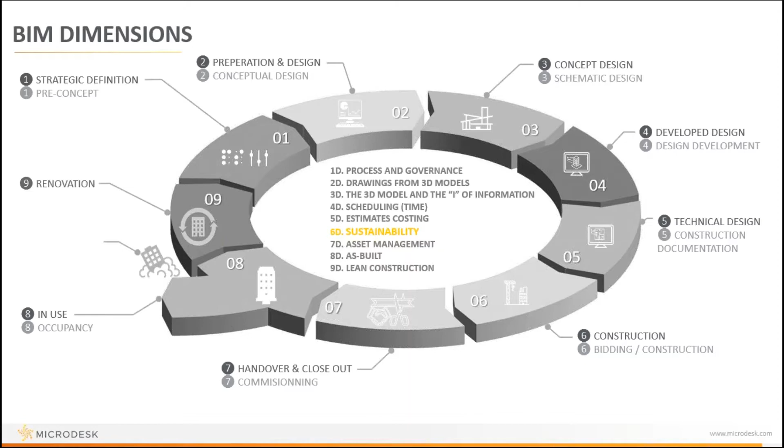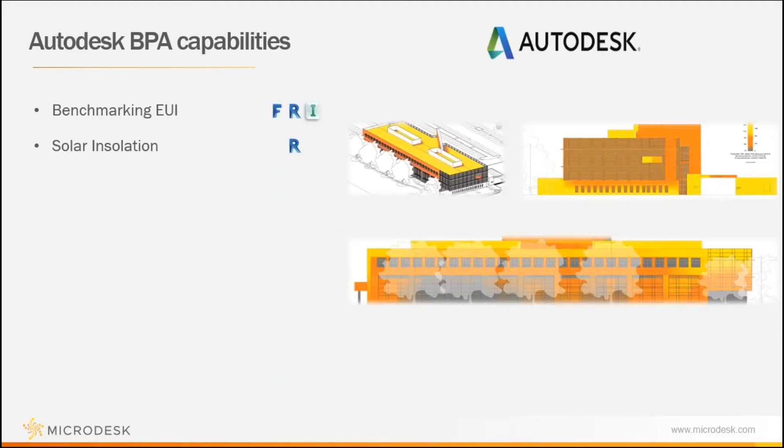On the next slide, we'll showcase our Autodesk building performance analysis capabilities. Here at Microdesk, we have the ability to help you benchmark and get your EUI within your BIM. We also have the ability to do solar insolation within your Revit model, as well as daylighting illuminance. The more integrated with BIM, keeping the information aspect in there, the better the end result. I really push for a single source of truth through BIM.

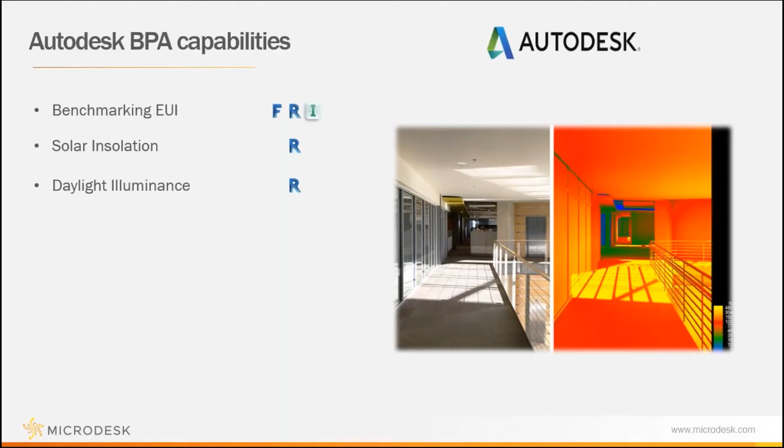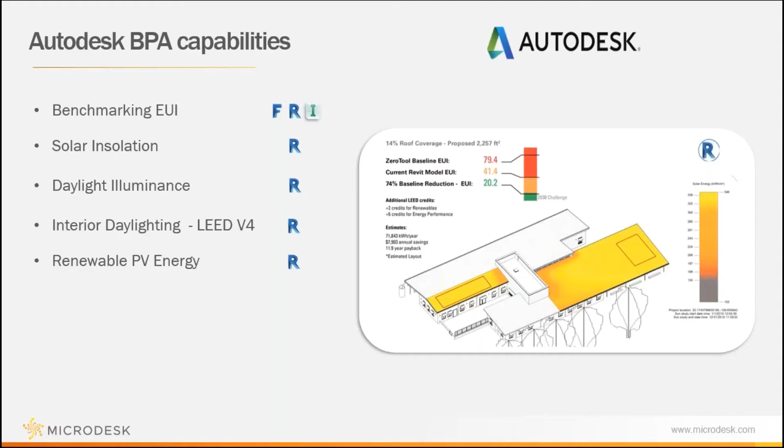Going through lighting, we have interior daylighting for LEED version 4 through Revit. We can also do renewable PV energy and get estimated payback times and estimated production. We can do building envelope heat transfer—we can do this in Autodesk CFD to extend your suite, but there are also free softwares out there we can help guide you with for envelope heat transfer studies.

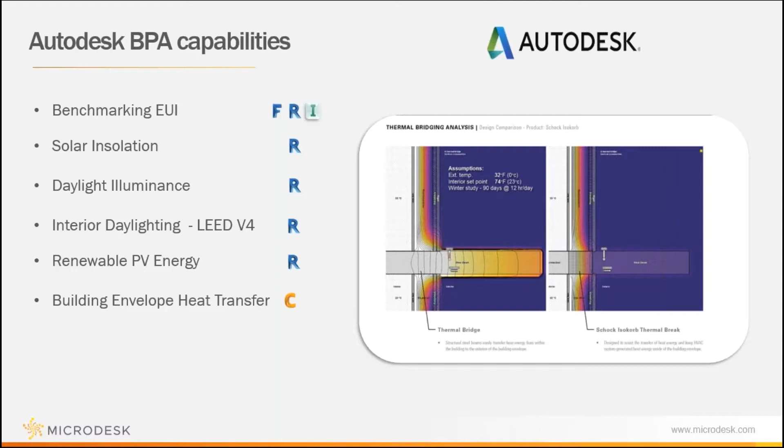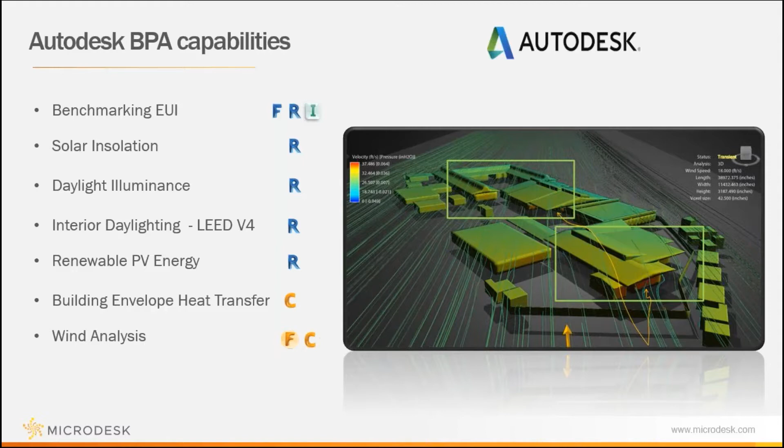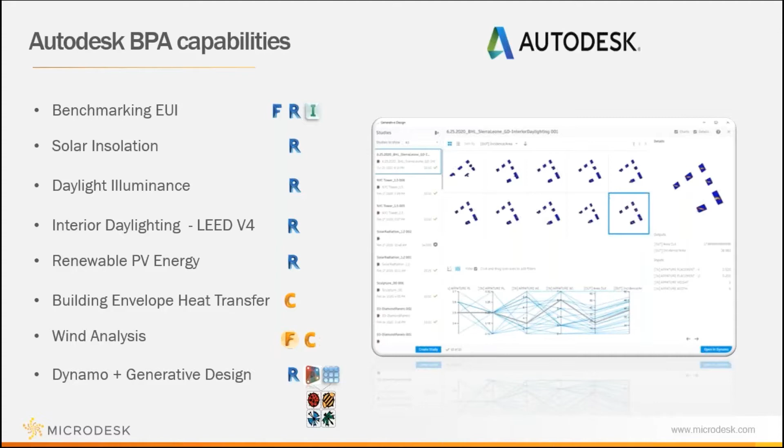We can do wind analysis with Flow Design and with CFD. There are other external tools for this, but to get you started we have all this within your Autodesk suite. Last but not least, the new kid on the block that everyone's talking about is Dynamo and generative design. We have capabilities for generative design through Dynamo, which we're using to leverage sustainable design—understanding which inputs will best leverage our building and give us the best head start from the beginning.

Aurora Solar can give you a system for PV design which you could hand to an installer and understand, down to the penny for your area code, what kind of PV designs are available to you. Cove Tool, Rhino, Grasshopper, Sefaira—all these tools are wonderful and good for their certain implementation. But the right tool for the right time is what we're trying to help you with—getting the best fit for your workflow.

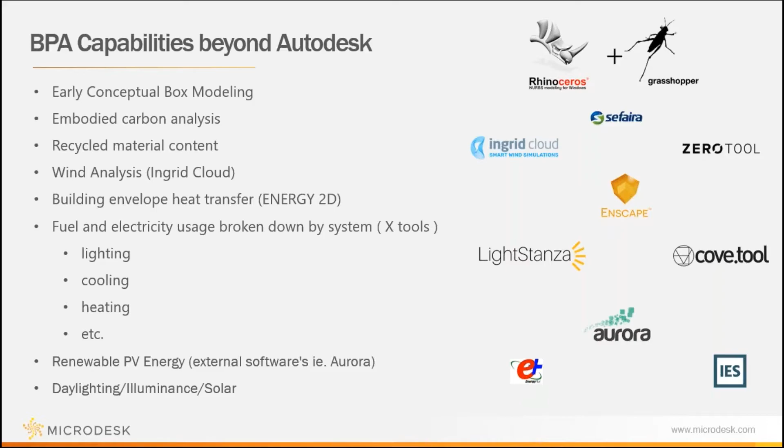So we'll briefly go over part 1 and part 2 of our sustainability webinar series. We started off with the NRG Stadium and the Astrodome Master Plan, looking at a multifamily complex, understanding building performance analysis through early conceptual design all the way through the more schematic and detailed design phase, which is what we'll go over today, where we start looking at systems analysis.

On the next slide, please, Jim. The plan today is to look at Revit systems analysis, which is a set of features that allows a mechanical engineer to define the main components and set of relationships that comprise a building system, all without having to physically model any part of it.

It's built using Energy Plus and Open Studio in collaboration with the US Department of Energy and the National Renewable Energy Laboratory. When you model in Revit to run the analysis, you export the data to Green Building Studio as a GB XML file. Then Open Studio takes that information from the GB XML and gets it into Energy Plus. Energy Plus then runs a bunch of simulations, which can then produce the reports.

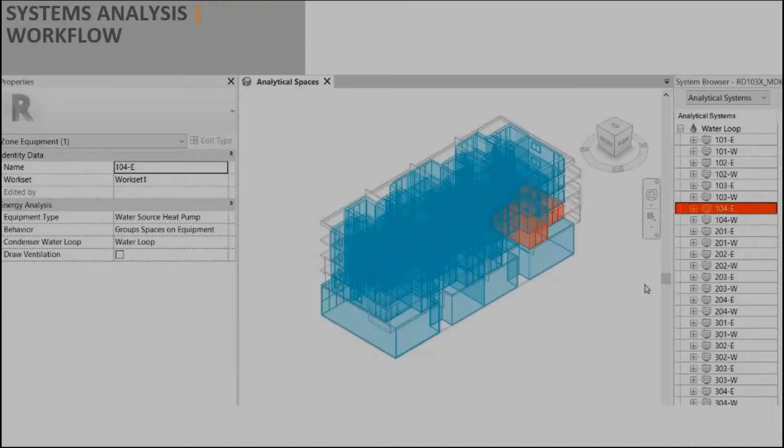The idea with the systems analysis workflow in Revit is that you define systems such as a water loop. You create equipment, say heat pumps, and assign them to the water loop system. In this example, we have separate apartments in our building. Apartment 101 has an east zone and a west zone. The idea in the loop is that you can see where there's a connection between the model and the building systems that we've got analytical setups for.

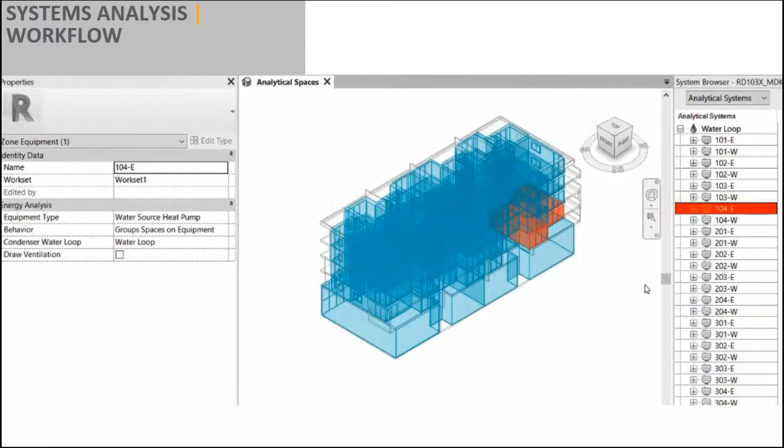Just to review how the model was set up, after we linked the architectural model, one of the first things we would do would be to set up the geographic location and the direction to true north.

As you can see here, if I just get this to run, we can go to the Analyze tab and pick our location. What you're seeing is the linked models that have the content in it, so we're able to take the architect's model and create really a copy of the things that are important to us. Where we look at the weather station, it may or may not be the case that that's the best location for you - you don't have to pick the nearest weather station.

You can also uncheck the box and... I'll start that again. We're having some lag time issues there. So setting up the weather station, what I wanted to show is that they're generally within 8 miles or 12 kilometers of the site.

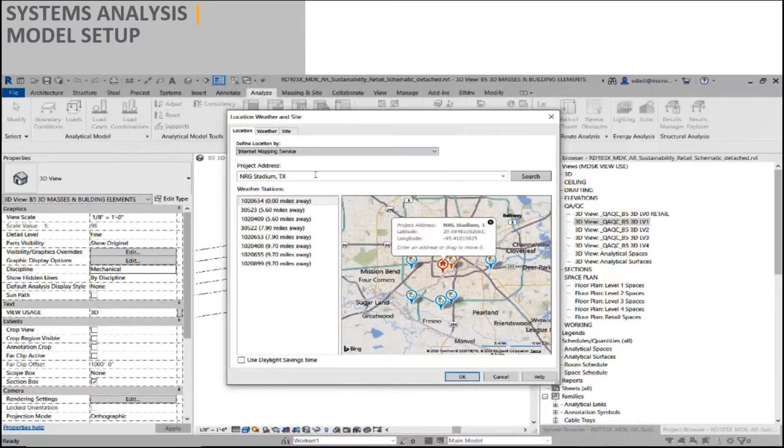You can pick the one that you want - we've got the NRG Stadium in Texas. But if you go to the weather station itself, you can also uncheck the box for 'use HVAC design data,' and you could enter the specific values that you want for the study. So you're not limited by what is offered in the defaults - you can overwrite them and provide your own values.

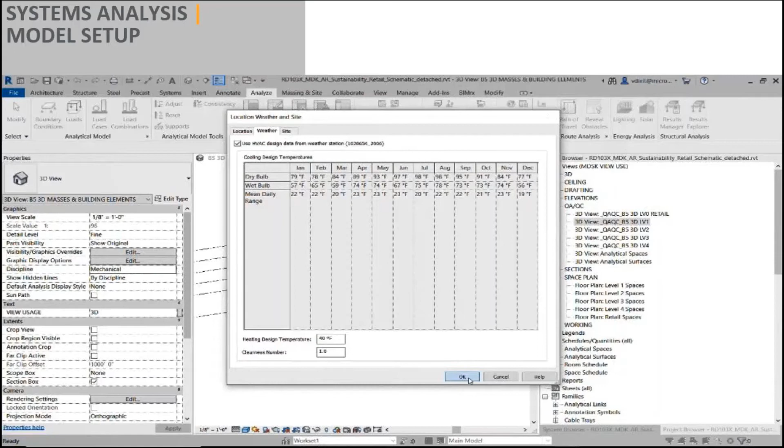The next thing we would want to do would be to actually bring in the elements of the building that are important to a study. I actually used this model for several different things, including light analysis using a rendering engine.

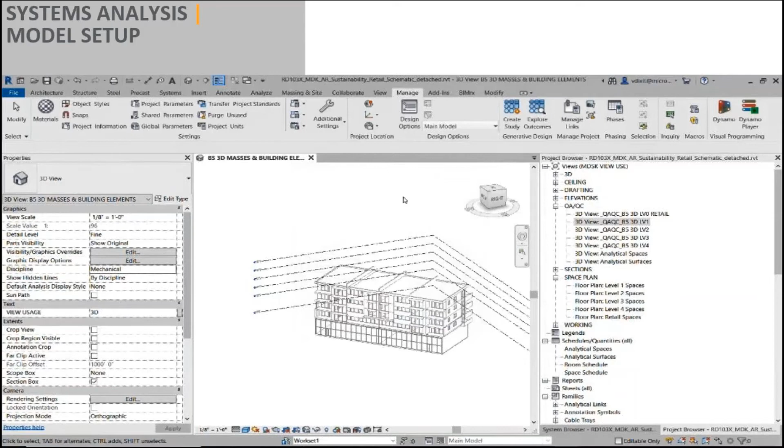We can use transfer project standards and bring in the architect's walls and floors, windows, and so on. And then we can use copy monitors, so that in this approach, what would happen is if the architect's model changes, we update it. By bringing in his actual walls and floors, we're making sure we've got the correct volumes in the building.

We have some quality assurance views where we can look at the different floors of the building and just confirm that the model is as we wanted it to be, where we're seeing walls in red, floors in blue, and the windows.

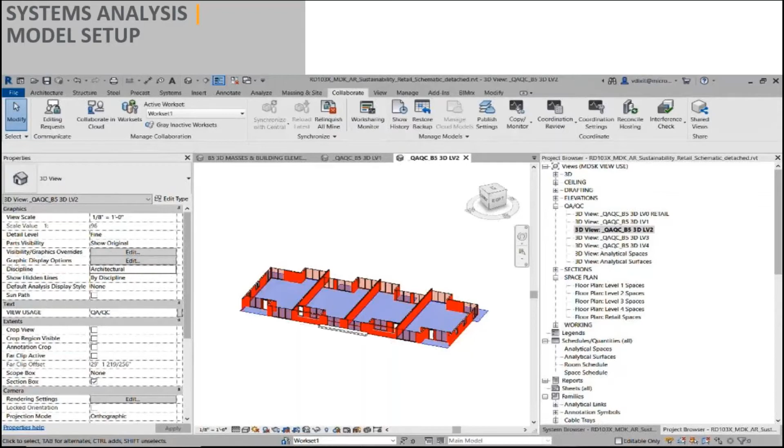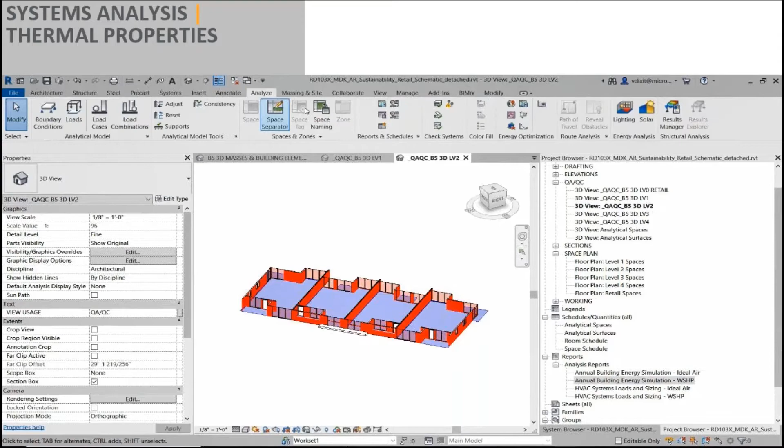So if I move forward with that, we're able to assign material properties with the U values using schematic type. Now that we've got the building model, or a copy from the architect's model, it can be updated anytime we want. When we submit for energy analysis, the option we could use is to tell it what the building type is, and then override any of the building elements with the U values that are required by code - in this case, in Houston.

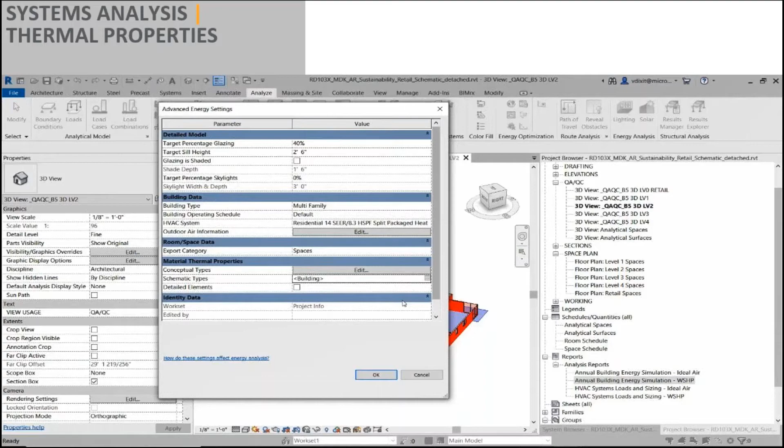I'm having a bit of a lag time here.

It might be that the architect, when working on energy analysis at a very early stage, has massing forms and building elements superimposed on them, used to imprint where the openings are, so you can do an energy study.

It's more likely that MEP systems analysis or energy analysis gets involved when you have building elements there and you're applying schematic types to override all the U values for the building elements themselves. There's also the option of using detailed elements that would override anything else - a checkbox when you submit that says use the actual material that's in the wall itself.

These are a little problematic. I've also run into situations with something like a hospital that's so old and been on the go for so many years that it may not even have thermal properties under the material. You'd actually have to introduce them to the material and assign the values you want.

There are cases I've seen where people have created their own wall types that are the same size as the architectural walls and assigned the material with the U values they want, especially when they have a special exterior to the building, maybe some kind of glass facade. So there are occasions where this would be valuable in creating the study.

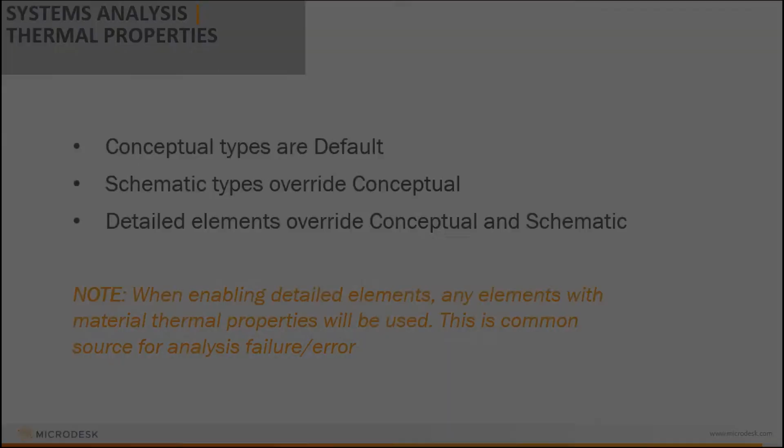We set out to specify what our building type is - you see here it says multifamily. In this first scenario, we've got residential units in the whole building, so we just need to assign building type, and any analytical spaces will be classified as multifamily.

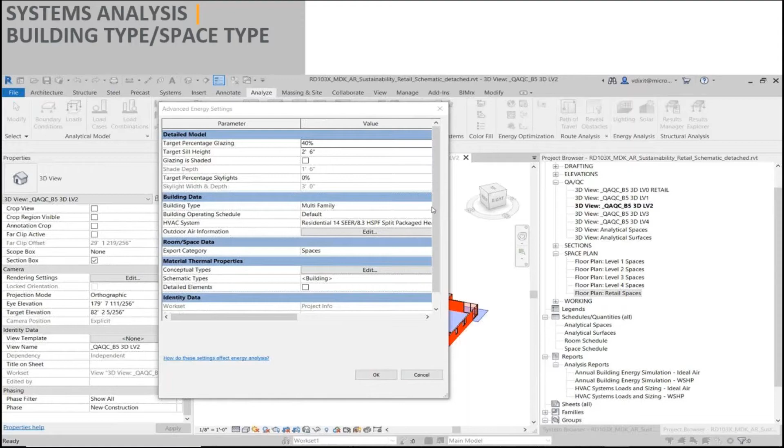We don't have internal walls at this point, so what we're doing is just kicking off a study, telling it it's multifamily, and producing our output from the reports.

If I look at the study here, we've got the Revit model, our single source of truth. We've got the energy model in the file, and we can have quality assurance views to look at the assignments. We have our systems browser showing what systems we've got, and output from the software on the performance of the whole building, or the heating and cooling loads for individual rooms or spaces.

If I move on, this is where everything is a single apartment, and we want to make sure the system browser is available to us and that we're able to define systems.

So what we're doing is looking at the system browser, only available to you if you've got MEP on your interface. Then we can do things like define a building system, say adding a water loop. There's already one there - this is just to show the process.

And you can define what it is, say it's condenser water - just delete it. So we've already got the building system.

Then what we want to do is define zone equipment. So we can create zone equipment, give it a name - we're calling it apartment 101, 102, 103, 104 - and defining which system it belongs to.

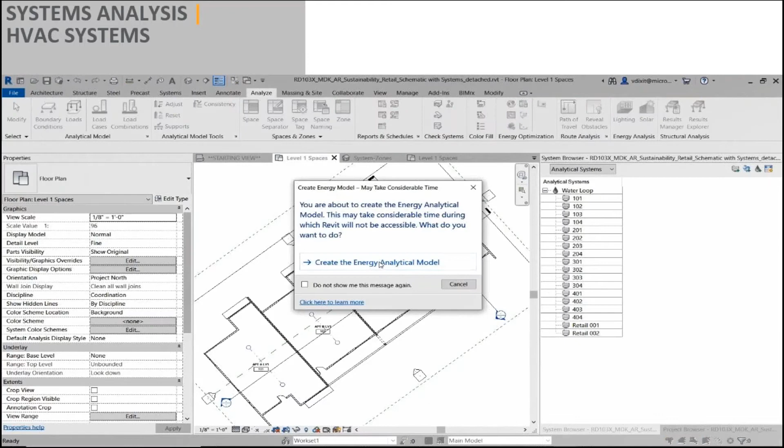As long as the lines intersect the space, they can be assigned to the respective zone and you can give it a name. So in our example here, when we kick off the model, it gets the loads from any spaces that are in there that have the ASHRAE standards for the different spaces.

And then we can kick off reports to get some quantitative output from our model itself. These take a while - it might take 15, 20 minutes before I get a report.

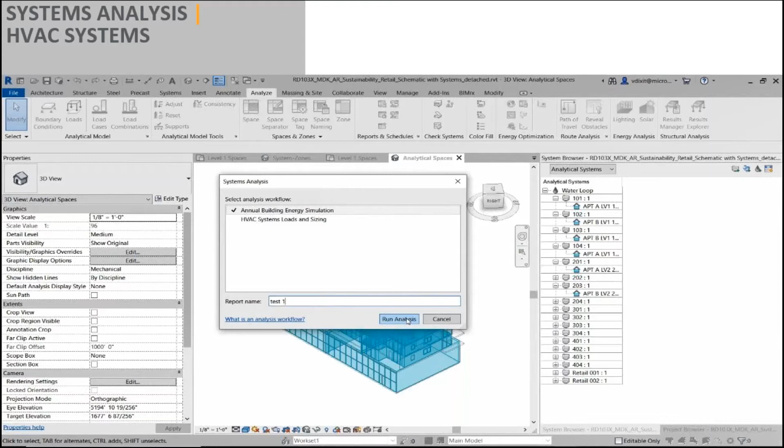You can give it any name that you want. It'll put it in two locations - on your project browser where you can go to reports and look at it, or it'll also create a subfolder below where your project is, and it puts files there that you can also look at.

I'm not sure that moved forward. There we go.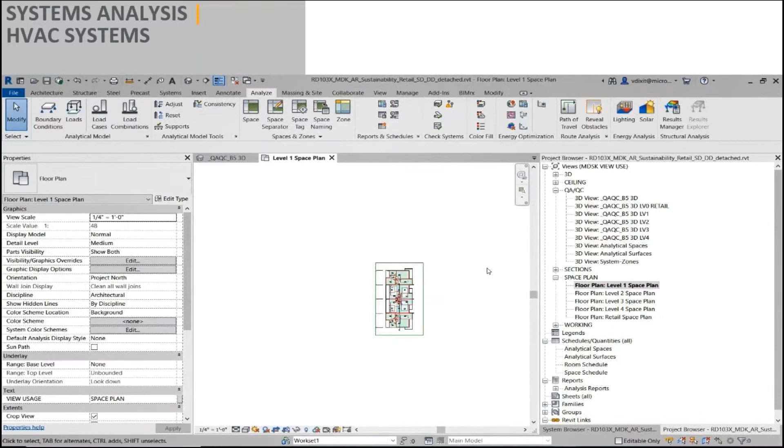So if I show on here, we've linked in the architect's model again, but the architect's model now has interior walls. We can use the space naming tool to take the architect's rooms and generate spaces with the same name throughout our project on the levels we're interested in.

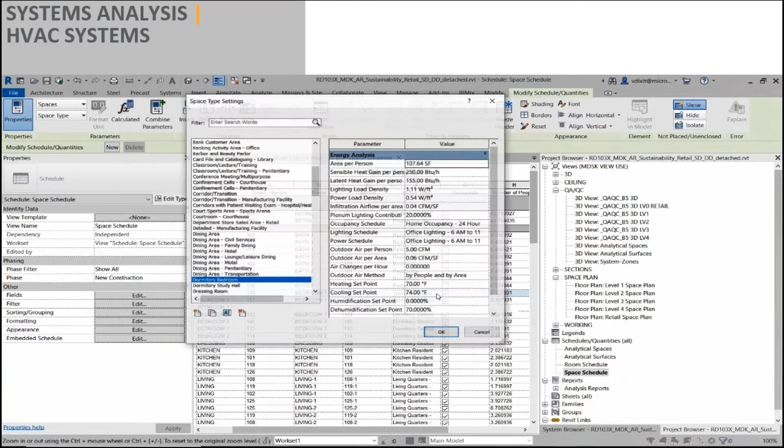And then we can have a space schedule so that we can actually assign, via the schedule, what the space type is, or other data from our Revit model.

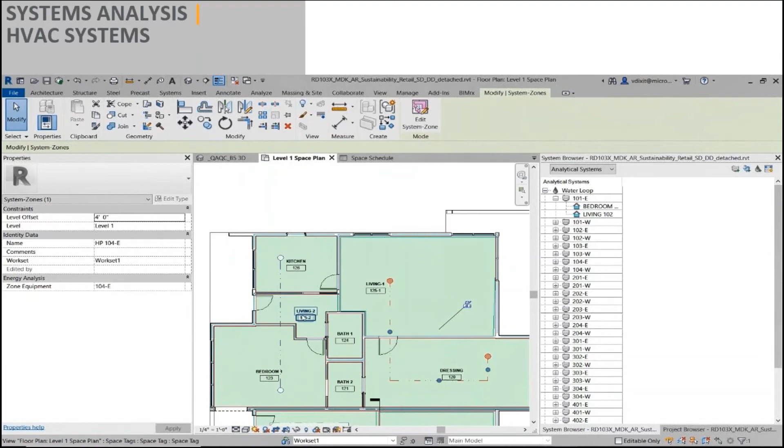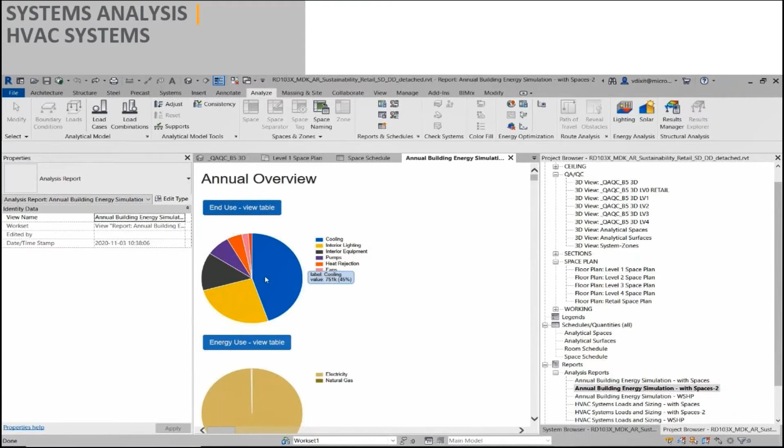We're ready to define the system. There's one already defined there, but what we're seeing is the line work that was drawn is making the association. The reports were kicked out, and they would show up and give us the building performance, where we can see data on a detailed report or a second report.

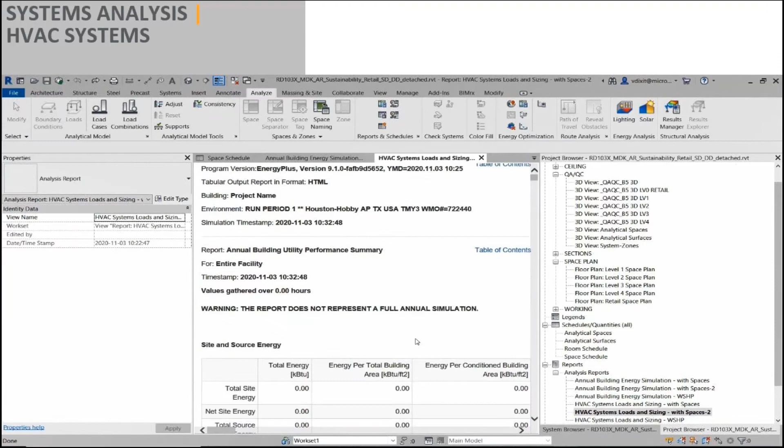There's also a content page where we can link to the data that's inside our model.

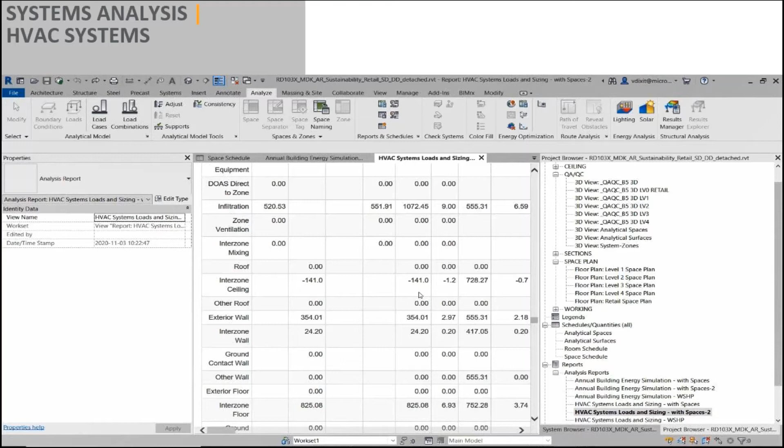So you can see that the cooling loads are the biggest component. We can review the HVAC system loads and sizing report and see the zone component load summary with heating and cooling sizing information for each of the analytical zones. Let me move a little forward on this.

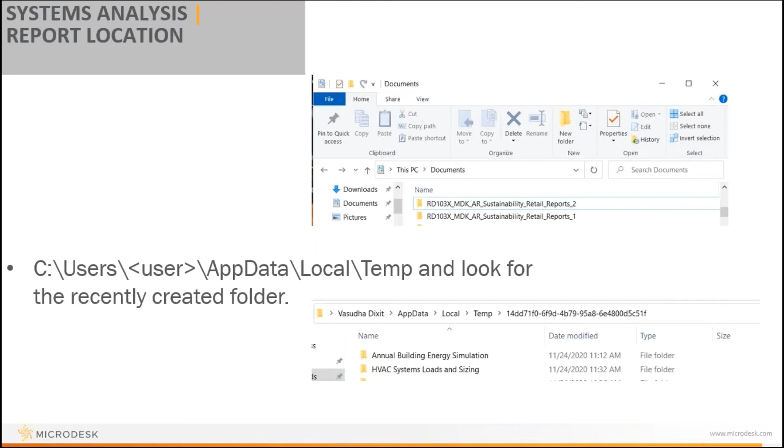I'm getting a huge delay on my system here. So the reports are output and saved in a folder, but they're also on the project browser, and you can look at those results.

So we're using that single source of truth to work with our model. The thing that came home to me strongly in working with the single source of truth is that it applies to a lot of different things that are germane to sustainability.

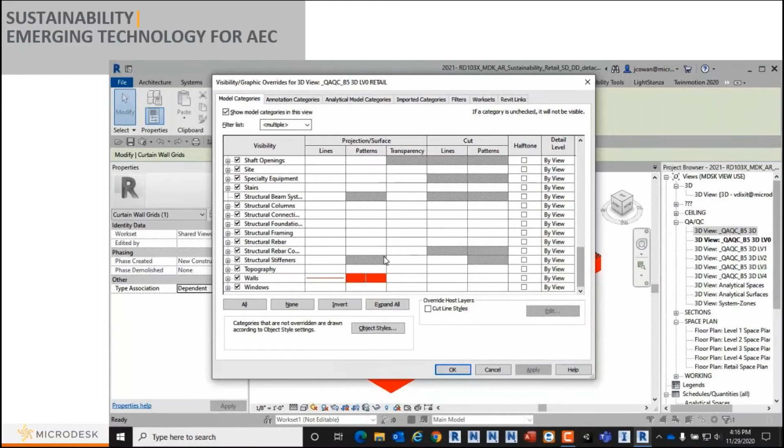So for example, here I'm looking at exactly the same model that Vasudha had, with retail on the bottom, apartment units on the top, building elements. Looking now at the lower floor, we have retail, with color overrides just to make it clearer what we're looking at, to check our energy model.

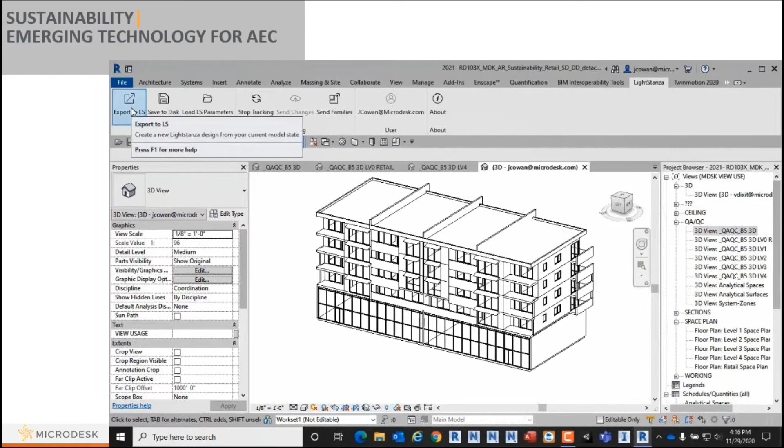And there's the top floor. If you remember in previous presentations, we did illumination studies on the top floor and bottom floor from inside Revit. We had Jeffrey Tiers model some additional shading, and we put that into the model. We knew it was efficient from the feedback he was getting.

Now what I'm going to do is send that single source of truth, that model I've got for energy analysis - I'll just call it lighting study. I can choose whether I want to include interior lights. I'm just going with the defaults.

This would be kind of like view templates where I can decide which categories are being saved for the study. So for example, when Jeffrey added the generic model, it was the shading - I can include that as part of our lighting study.

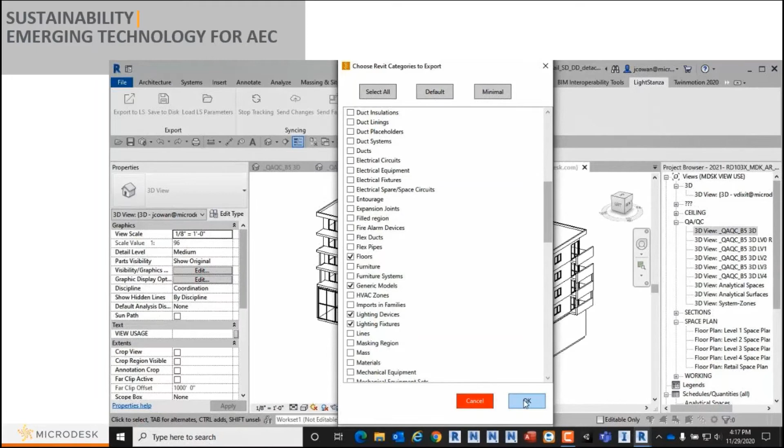I can save the whole model, or do it for individual rooms or individual floors, and I can choose spaces, which was my default there. It might be in a project that I really only need to look at one or two of the apartments, not all of it, just to see how much time it was actually going to take. If I want all of the floor levels in the building, all I need to do is check them on, instead of drilling down to pick an individual room.

I can submit the report. It's the study - there's a connection between this model and the study.

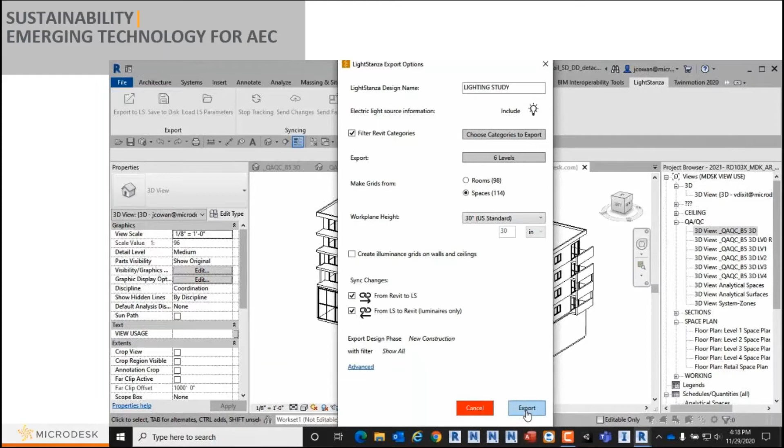For example, if I modify lighting or something in the study, interior lights, I can send that back to the Revit model based on the analysis of lighting within my building. I'm going to turn off the interface just so that we see the views of the building.

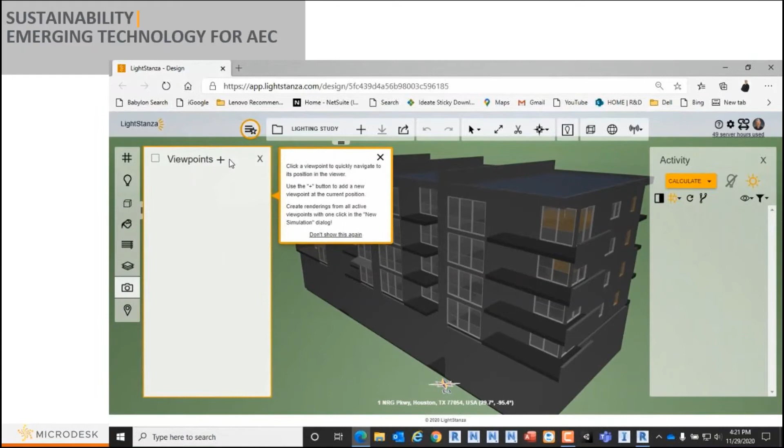If you're a Navisworks user, you know that cameras are referred to as viewpoints. It's kind of similar in here. I can have different viewpoints to look at my model.

This is not edited, so what it's done is it's picked up the location from the Revit model. It didn't require that I go and submit for each individual study what kind of logarithmic scale I wanted for the lighting. It's got defaults that I can establish for my project at the beginning, I want to use imperial units, what range it is.

If I go back in here, I can say what I'd like to do is any one of those studies. So the idea is that next year would present fuller presentations on how you can use a single sustainability model to do multiple studies.

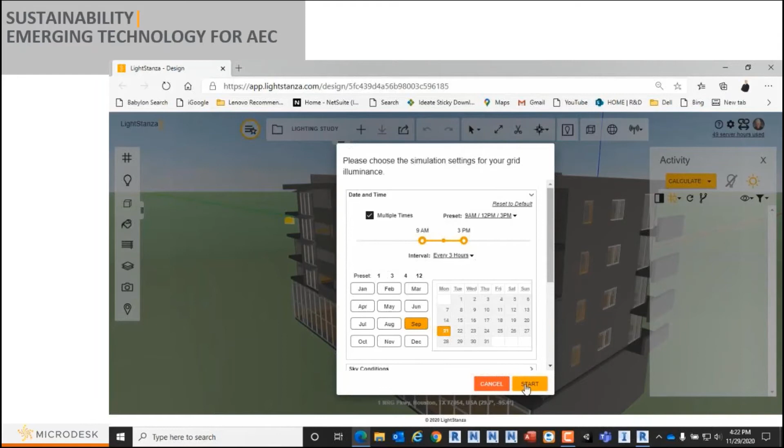So previously what we'd done was look at the fall equinox. Here I submitted for 9 a.m., 12 p.m. and 3 p.m. in the afternoon. I renamed my report, Illuminance September Equinox.

I can look at the floor plans in my building. So I've got views where I can go look at my multifamily or my retail.

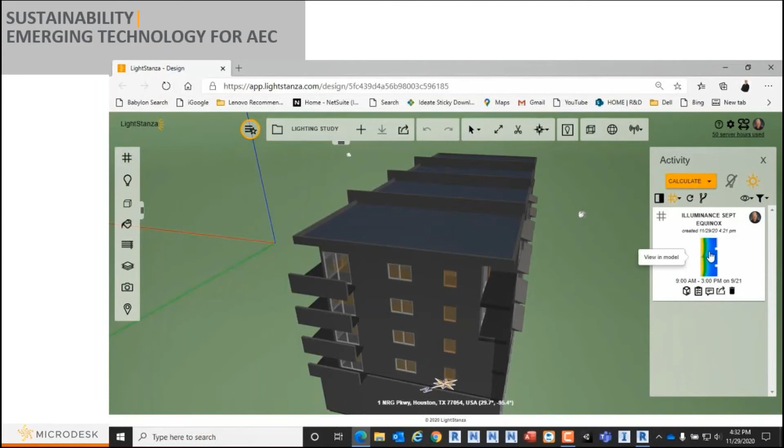This is actually recorded, just saving the report. As I look on the right-hand side, the progress bar is telling me that it's creating the graphics for the report. I can click on the view to view it in the model, and I can see the illuminance report for each and every floor of my building.

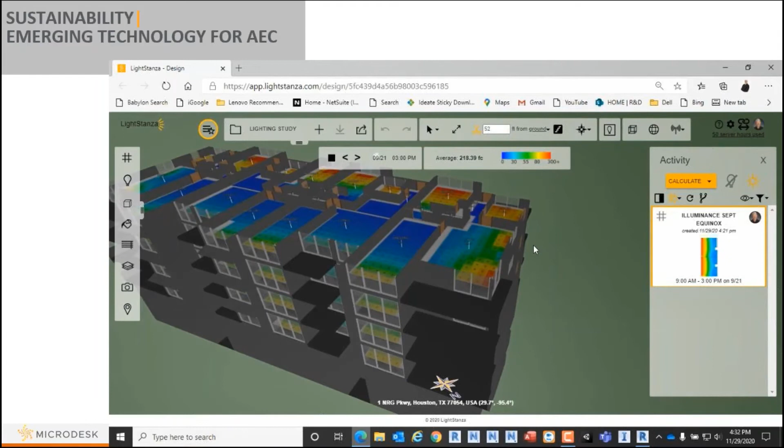And if I zoomed in a bit, you'd see that it's actually got the light levels showing in the interiors. I can go to as small as a 6-inch grid.

It also will give me more reports that I could work on as well. So the idea there would be that from the same model that we used for the energy analysis, we're able to go and do lighting analysis in our project.

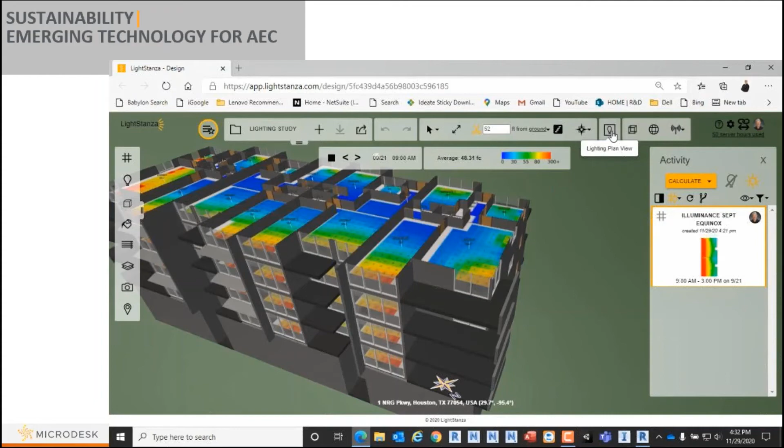The other one would be using a rendering engine. So we have other teams that are exploring using... so there's something not moving forward here, it's misbehaving somewhat. I mentioned we've got another team that's looking at using Unity with Reflect, or Unreal with Twinmotion. We're exploring all of the options. But again, it's the same model.

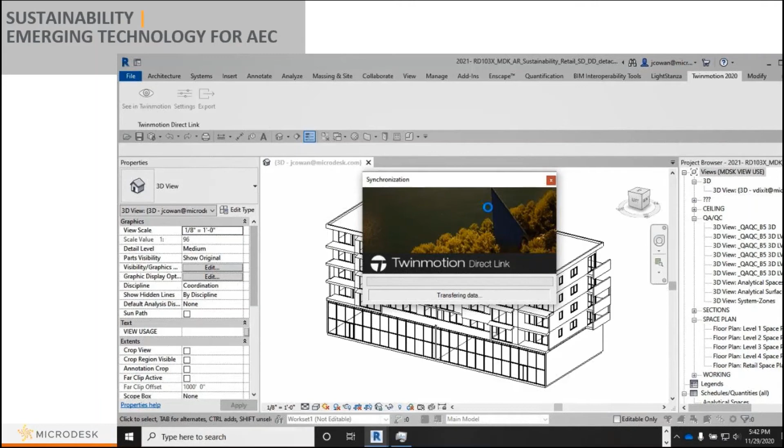So if I wanted to produce something that was maybe augmented reality or virtual reality, or I wanted just to improve the presentation quality of the proposals that we're looking on for sustainability, I could use any of those tools. So for example, if I bring up from this model, the study that's created...

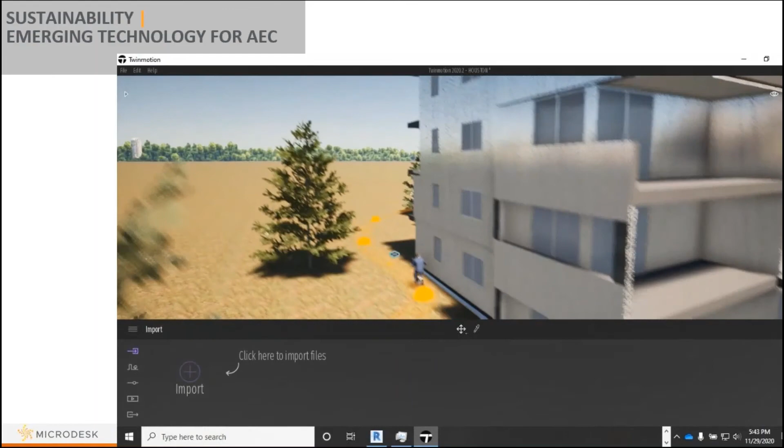I can update that anytime that the model changes, but I can have saved content in here. So there's my Houston project. The kind of thing that this is going to let me do is change materials for presentation purposes.

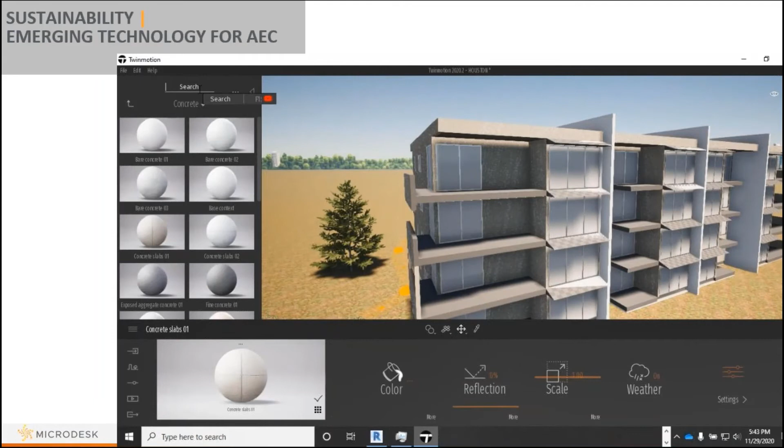A large library of photorealistic materials where I can pick a material and simply drag it onto a surface. I can search for items, like I'm looking for a different glass.

So if that one model changes, my virtual reality model would update, or if my lighting changes in Revit, my lighting models would update.

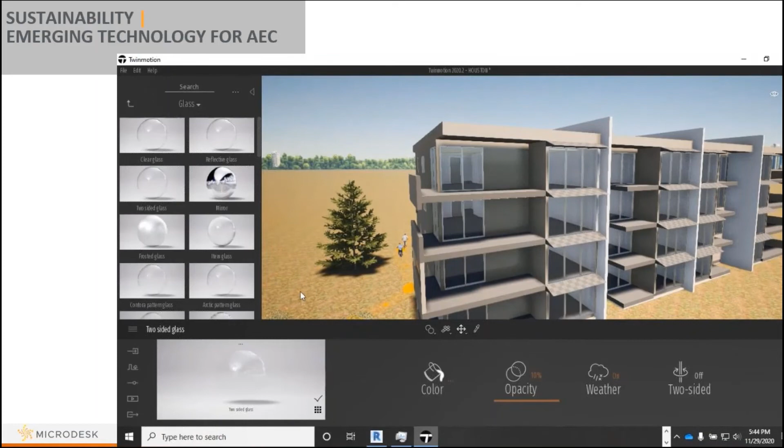So we're looking at things like what impact would green roofs have on our building.

So the kind of thing that I could be doing here, apart from modeling it in Revit, would be that if I want, I can turn on and off the display of objects in my model.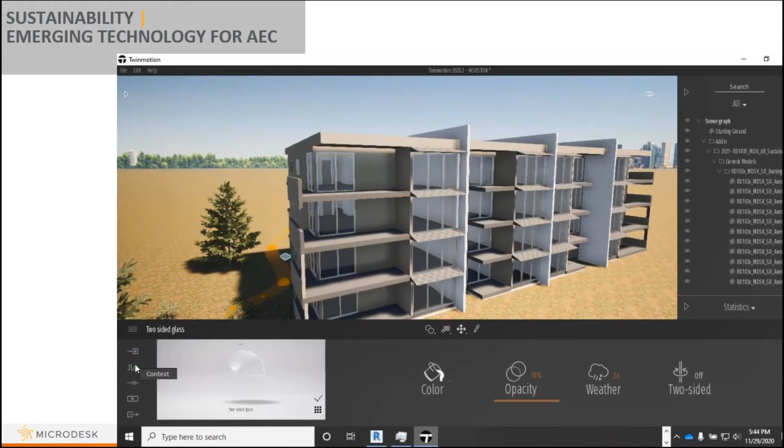And then what I want to show here is that combining all the tools to use their best features, I can add animations with paths. For example, our sustainable advocate who rides bicycles everywhere.

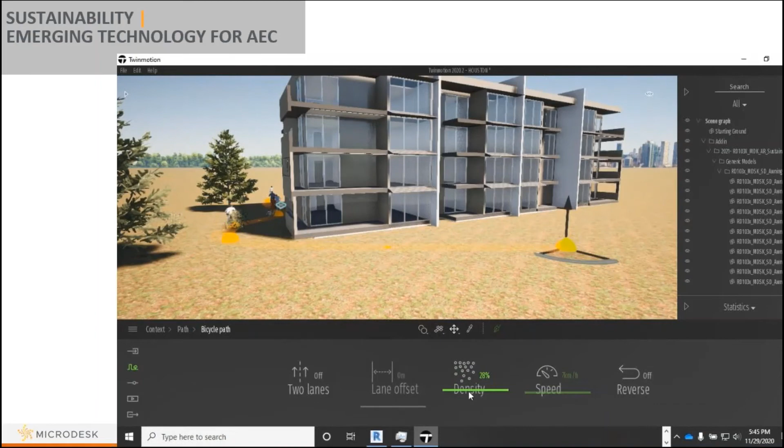These have properties in here where we can do things like increase or decrease the number, change the speed. So I'm trying to just think of how all this relates as one connected model for sustainability issues.

So thinking about maybe putting in a roof garden of some sort, what I can do is I can collect vegetation. So I want a green roof. I could go and look for, say, small bushes.

I could go search and get some grass. Typically, I'd be looking for sedum species and doing a unique built-up roof with correct soils and so on, irrigation, proper seal from the rest of the building. All I'm trying to show here is that I can paint the surface and change the diameter of the tool I'm painting with.

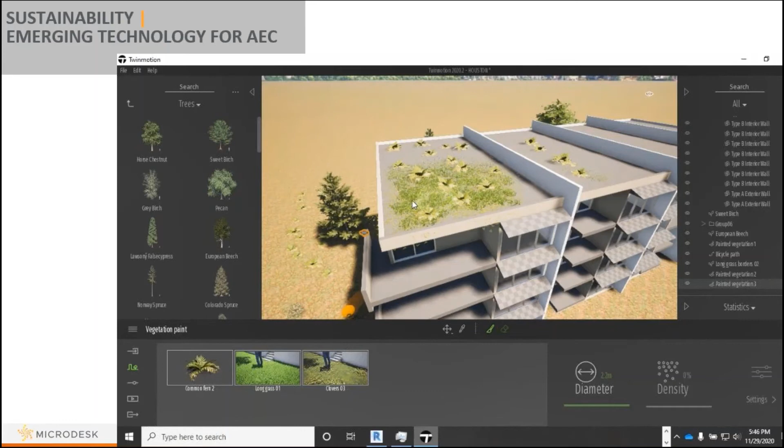So what I'm doing is just adjusting the size and dragging over the surface to paint a combination of these species onto the roof itself, getting that planting mix as part of my study. I can drop it on the ground, put it any place I want. That would probably be a roof system in Revit that has the seed mix in it, for quantitative reasons, but also for visual reasons so I can illustrate it in this model.

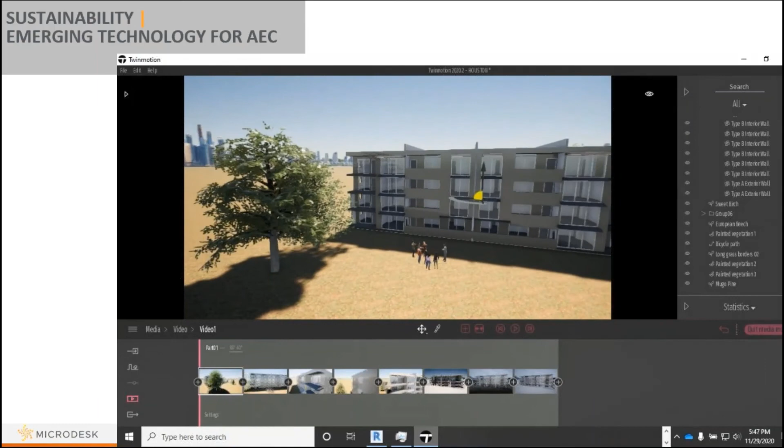I've got media where I can have saved camera paths. You saw us use Enscape and other products in past presentations where we did things like measure illuminance, measure foot candles inside a building. But what I want to show here is the ability, with these rendering engines like Unreal or Unity, to change the season.

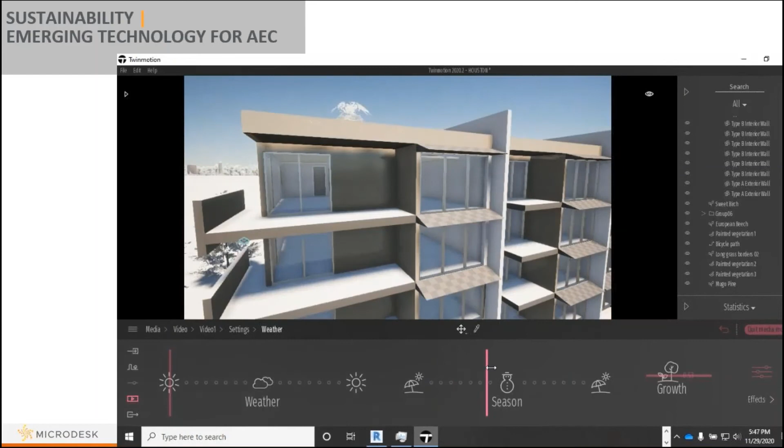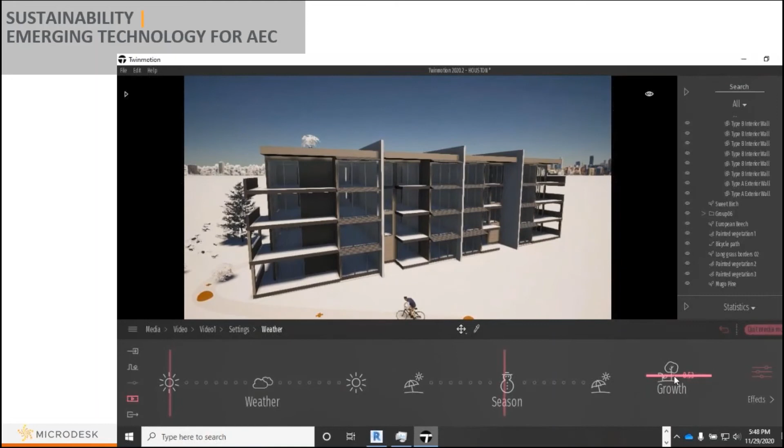So I could go into a particular saved session and decide, okay, what I want is summer, or frequent rain in Houston at certain times of year, bright sunlight. I can change this for that sequence of the animation. I can even pick winter season, so I'm seeing snow on the ground. And if I do winter season but also say I'd like different weather, you'll see the plants themselves actually change to show fall color, or if they're deciduous they'll change with the season, and I can grow the plants.

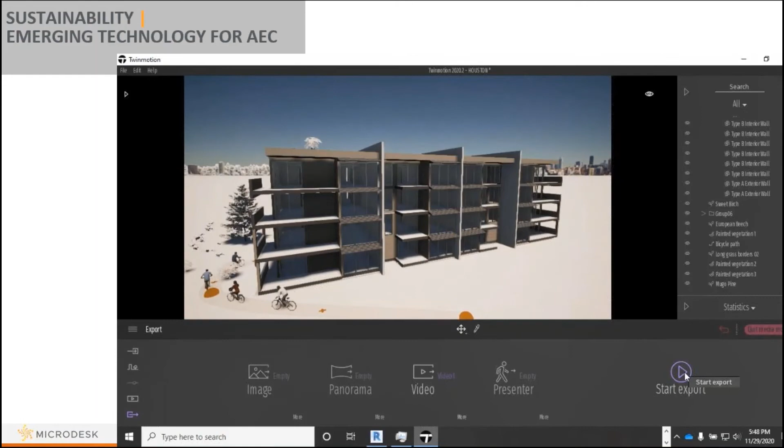And then I can export out videos to present to a client from whatever settings I have in here. So exporting it out, it rendered it, put it in a particular folder, and it took about 10 minutes. Then I can come back with my output movie to explain my proposals to the client.

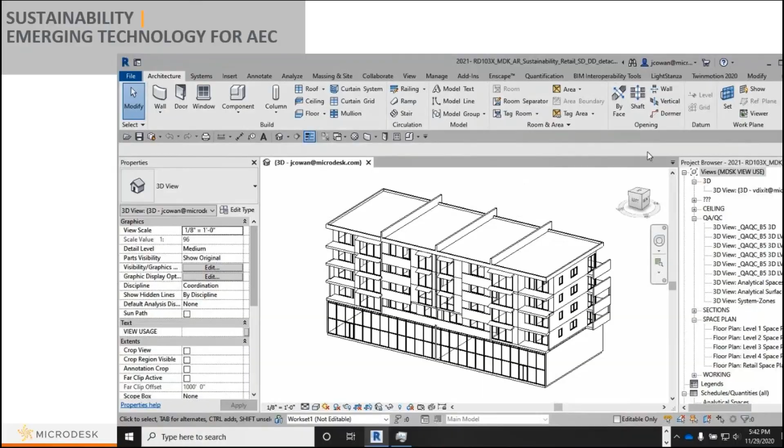So the main takeaway should be that I've got a single source of truth inside Revit, but all the different tools available let me use that data to do systems analysis, lighting analysis, augmented reality, and many other options. So that was where I wanted to switch back. I apologize, we're getting a lag time for some reason in the presentation.

Luke, did you want to kick in here, or? Yeah, perfect. Sorry, thanks, Jim.

So just to sum up, the point Jim was making is that it's about using the best fit tool at the right time and being able to leverage that tool's best ability for your analysis, understanding how all these tools are interconnected, and when you make an adjustment somewhere, how it affects other parts of your analysis. So through part one and part two, we leveraged all the building performance analysis tools that an architect would use through early design. Then Jim started getting into where the architect and engineer start to engage and push these strategies into reality.